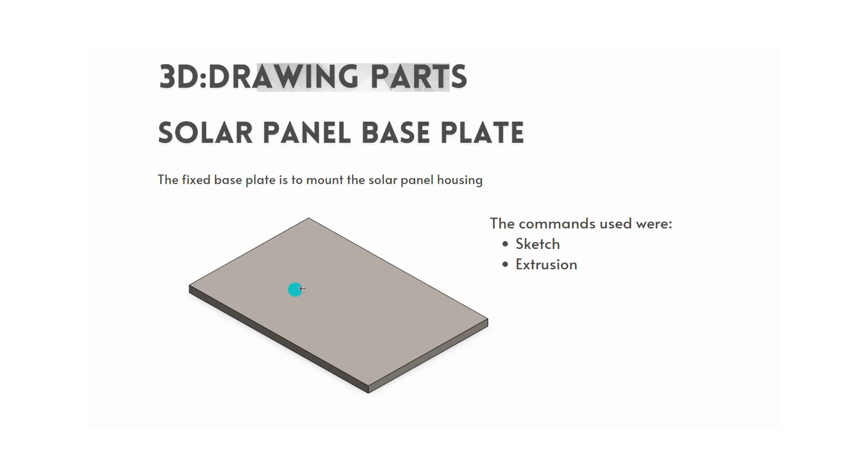Here's the base plate. The commands were just simply sketching and extruding the plate. Same thing for the base legs of the panel. I sketched them and then extruded them. For the panel itself, obviously I had sketched it, I had extruded it up. For these parts of the panel here, the panel itself, these were again sketching, extruding.

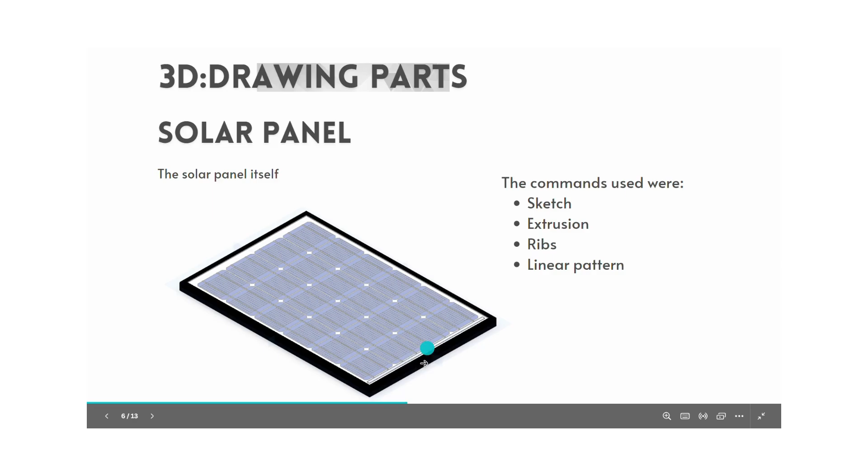Some of these longer lines that went across, I used ribs for them. And for these smaller lines on each panel, I used linear pattern for them as well as the blue panels themselves to make the pattern on the whole solar panel. Here are the hinges that connect the solar panel to the base plate. For this, it was simply sketching, extruding, extruded out again. I drew a pattern here, made it here, created this hole with extruded cut, and used linear pattern to make two of them.

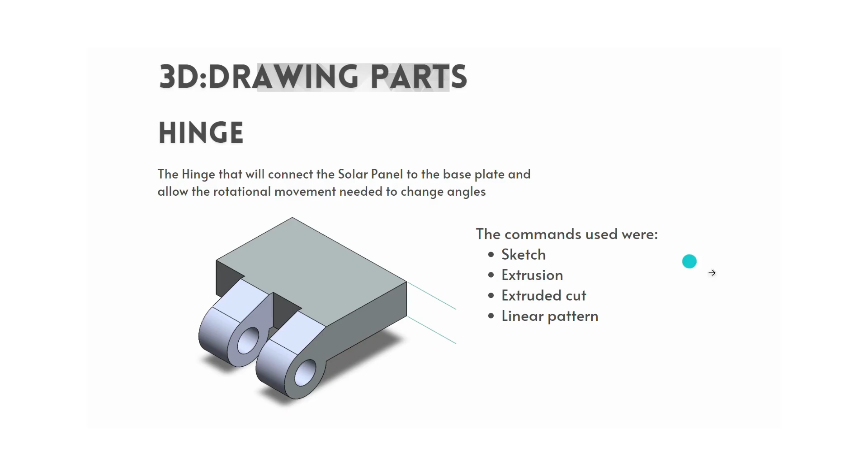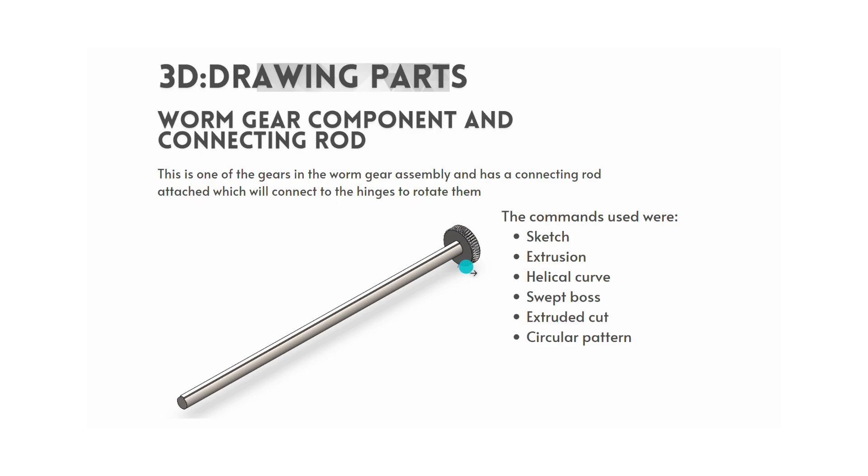Here's one of the components, one of the parts of the worm gear, as well as the connecting rod that connected through the hinges. Here was again simply sketching, extruding. I used the helical curve. I think it's visible here as well. Helical curve as well as the swept boss to make one of the cuts here, the circular pattern to make it all around the gear, and the extruded cut was to make the hole inside the gear to place this shaft.

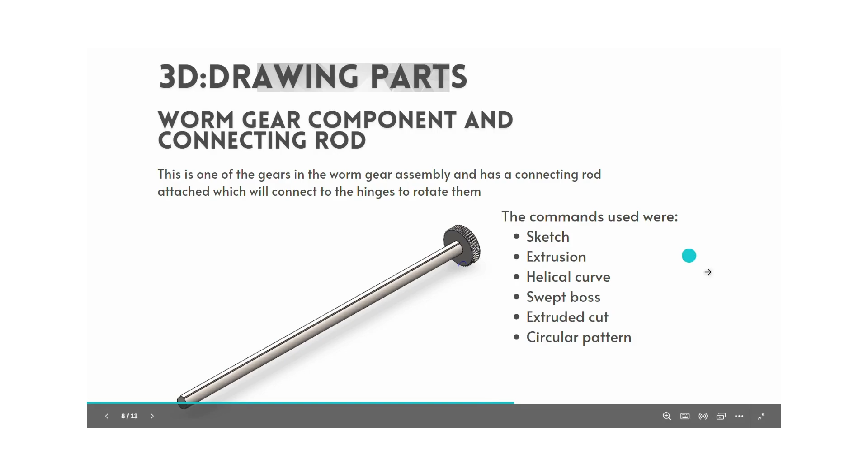Here's the final assembly. The mating commands that I used were concentricity, which was to align these shafts and the holes, coincident to make sure that the hinges and multiple parts lined up correctly. I used the distance command to make sure that the distance from this worm gear to this end was constant from here to here, so as to make sure that this was in place and so I could actually rotate

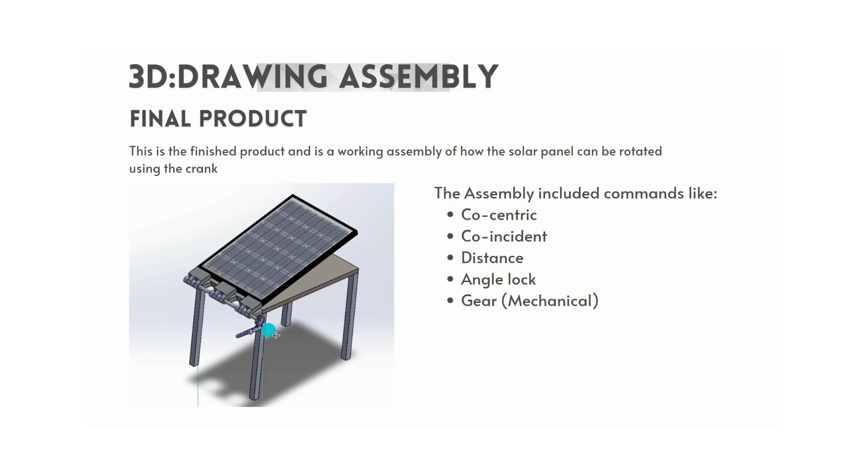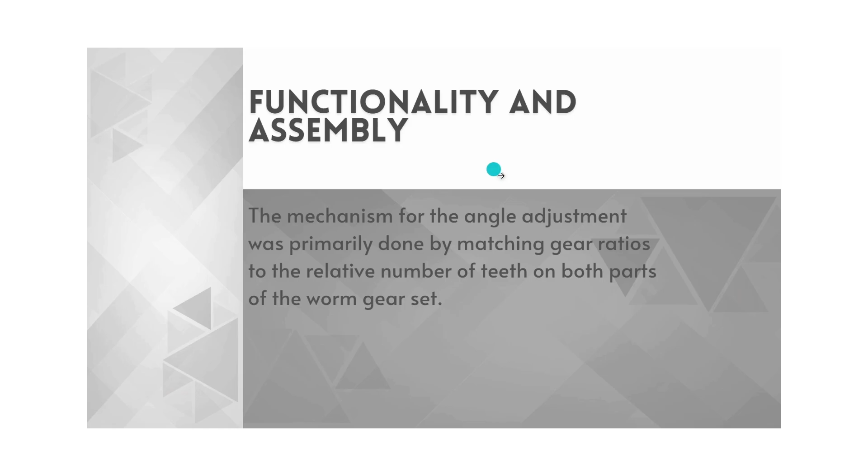this crank. Angle lock was to make sure the solar panel can go from 0 to 90, no more than that. And gear mechanical was to create the ratio between these two gears. So how many times I rotate this crank would dictate how much this would rotate in turn. So yeah, the mechanism for the angle adjustment was primarily done by adjusting those gear ratios relative to the teeth on both of the gear parts in the set.

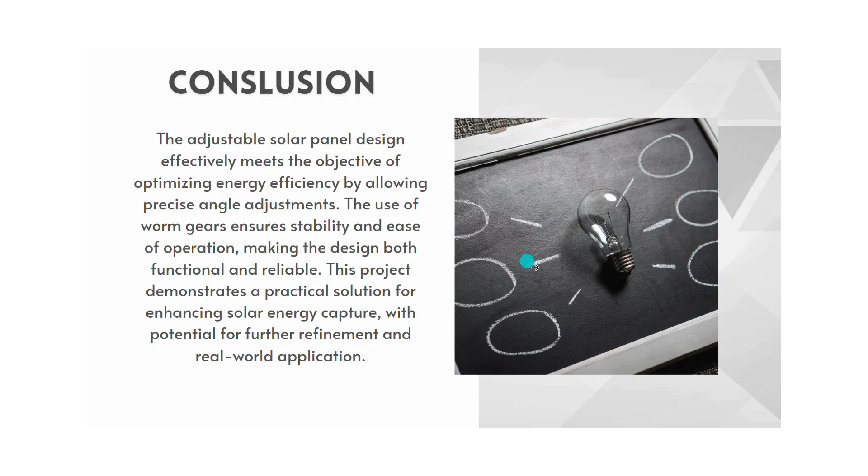And for conclusion, this whole objective was to make sure that we can make the solar panels energy efficient by adjusting the angle according to the sun, and so we can further use this in real life applications.

Thank you, and I would also like to... my apologies, the video cut out because I was switching tabs.

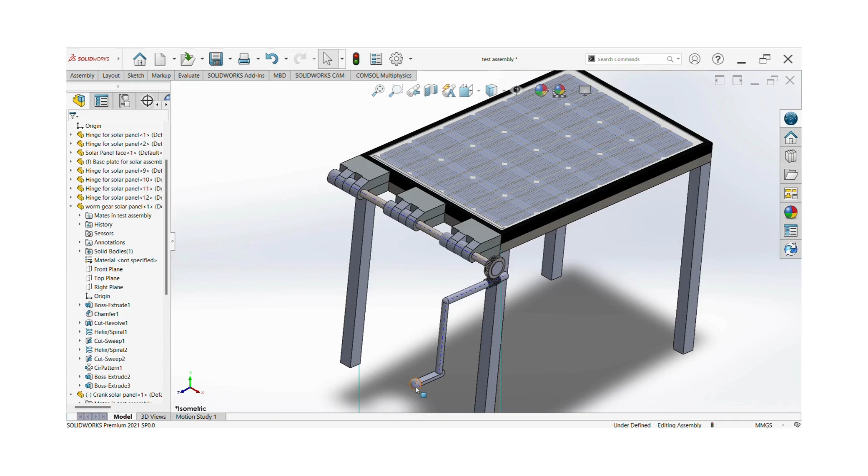Here's the actual assembly. I'd like to show this as well. Here is the crank that you can use to rotate the solar panel, and the panel rotates as well. You can adjust it to whatever angle you want. And the fact that these are worm gears means that I can rotate this crank to make this gear move, but this gear will not be able to move this back.

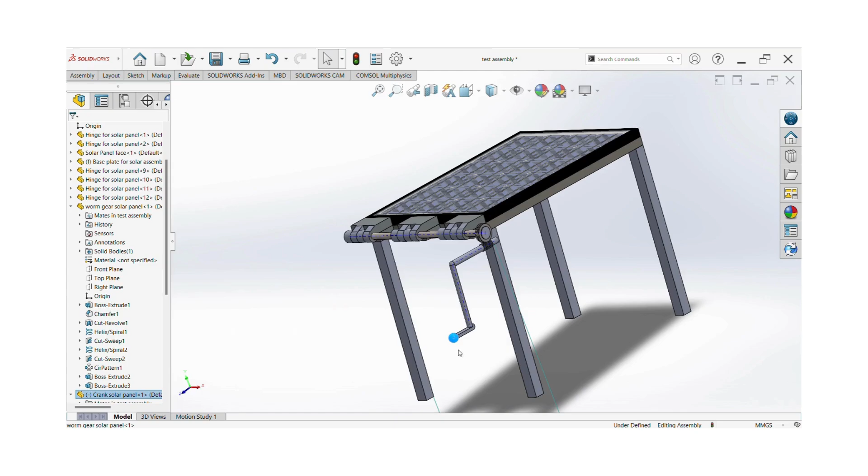So this also acts as a self-locking mechanism, making sure that whatever height or angle I adjust the solar panel to, it'll stay at that angle. And the rest of the assembly is there, the legs, the base plate. Here are the hinges. There is one hinge for each part like this. One of the hinges will go on the panel, one will go on the plate, and I've created three sets.

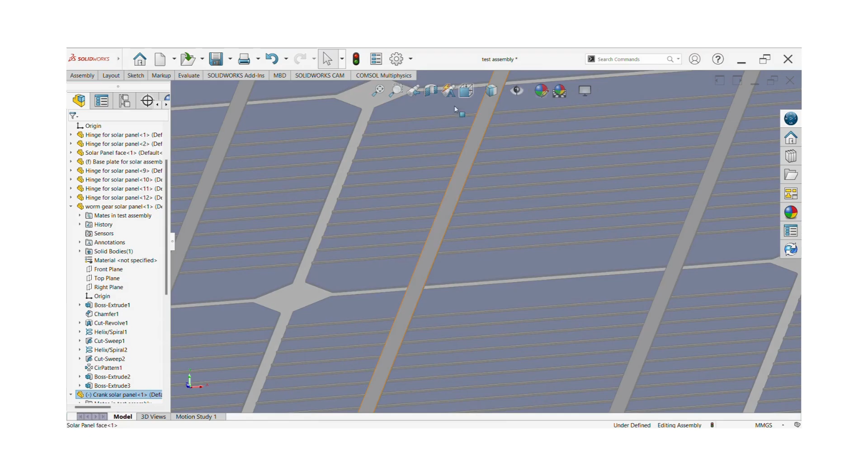The rest is, we have the panel here, we have the ribs that went across the upper part, the extrusions, the linear pattern that was used to make all of them. There's a clear glass sheet on it as well, which maybe isn't as visible, but that is the primary assembly for this panel.